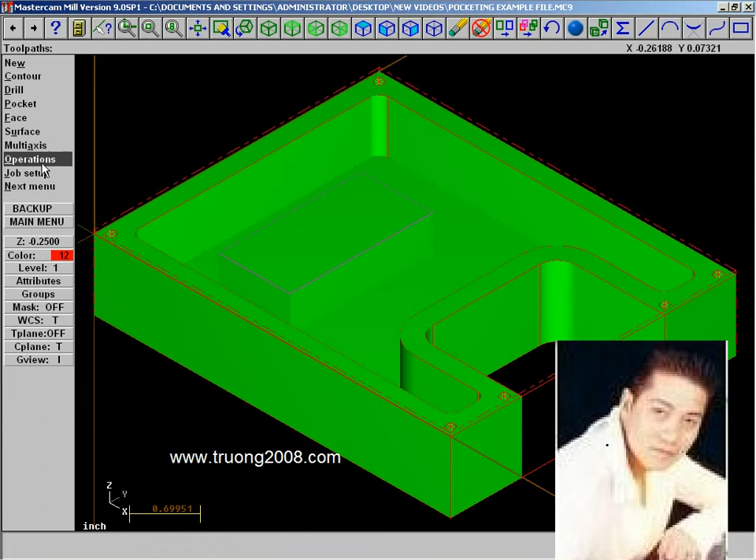If we select our Operations Manager here from the Toolpath menu, we can see that our first pocket here is selected as a pocket, but it's also set to facing. So let's select just this toolpath, turn the toolpath display on, and let's look at what we're doing. We're using this toolpath to face the top of the part. And let's look at how we do that.

If we click on the pocketing parameters, you can see that our pocket type is set to facing. And if we click on the facing button, we can see that the overlap percentage, or the percentage that is going to overlap the outside of our boundary, is set to 50%, telling us that our overlap amount is 0.25, and we're using a 0.3 approach distance and a 0.3 exit distance.

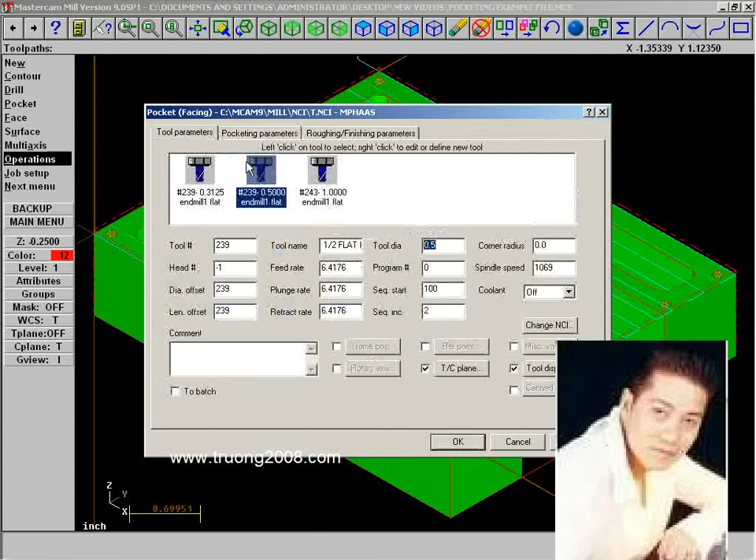If we go into the tool parameters, you can see that we've got a 1/2 inch flat end mill selected. We're not using depth cuts in this case, although we could, and we're set to climb milling. If I click on the roughing and finishing parameters, you can also see that I've got this set to rough it out in a zigzag pattern, and we're not doing finish pass spacing around the outside boundary.

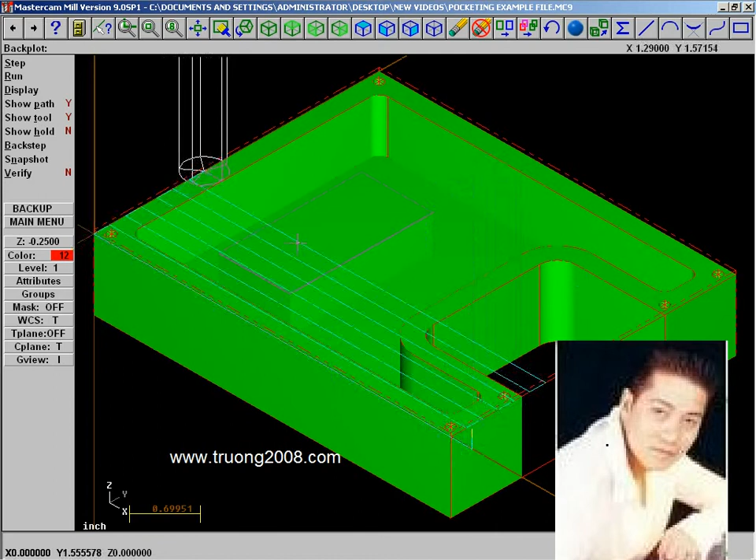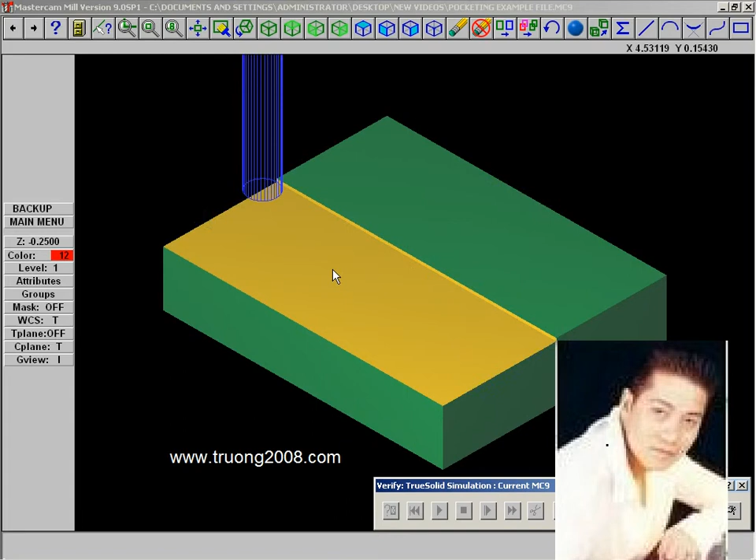So we say OK, and let's backplot this. And as I press S on the keyboard, we can watch the tool feeding across the face of this part. If we take that same toolpath and we click on the Verify button, let's go in and make sure that our job setup values are correct. Now if I turn down speed a little bit and press play, we can watch as the tool comes in and just faces off the top section of our part.

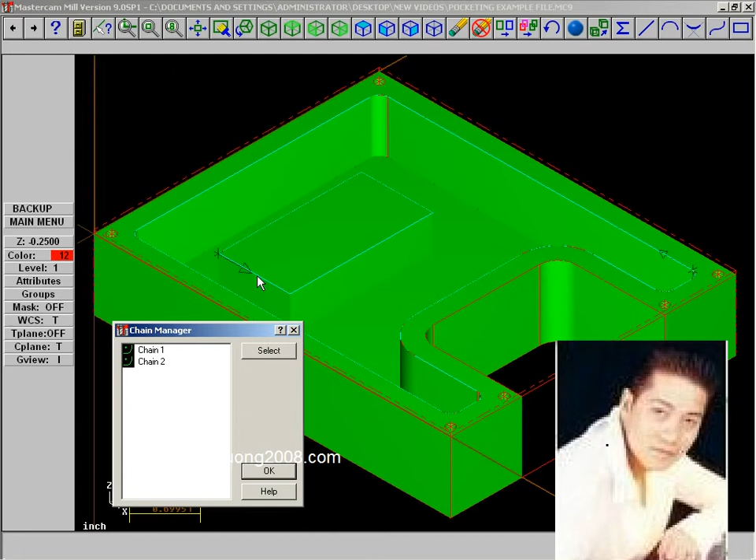So facing is one of the pocketing options we can do. Let's go ahead and turn this toolpath display off. And let's look at our next style of pocketing, which is island facing. Notice that for the island facing we have 2 chains selected for our geometry. If I click on the chain manager, we can observe those. I've got the outside contour of the pocket selected, as well as the top of our island.

Let's look at some of the parameters now. Let's look at the pocketing parameters. You notice that the pocketing type is set to island facing, and when we set it to island facing, it also gives us our overlap percentage and overlap amount. We can see that our approach and exit distance from the island is 0.3, and the stock that we're going to leave above that island is 0.0. We're actually going to finish that island at this step.

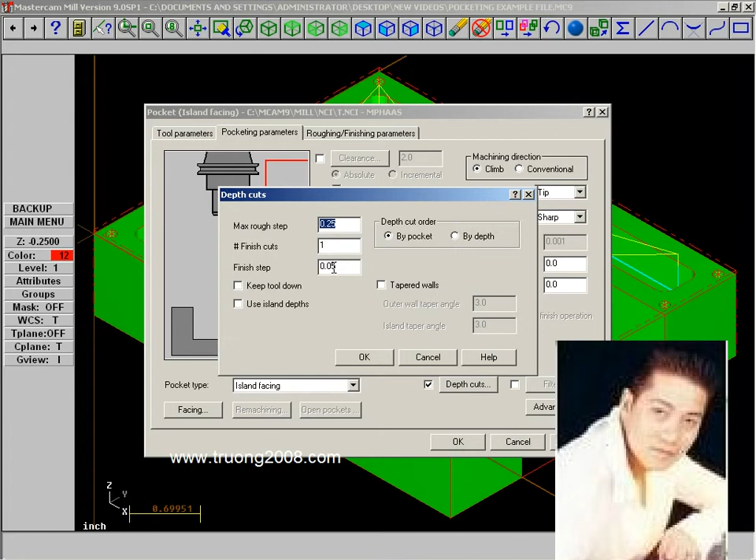We can see that we've got our depth cuts button turned on. The maximum rough step that our tool can take is 0.25, 1/4 inch, and we're going to do one finish pass of 50 thousandths of an inch at the final depth. If we look at our roughing and finishing parameters, you can see that the roughing style we've chosen is a parallel spiral with step over percentage of 45%. We're going to do one finish pass, and we're going to finish the outer boundaries of our pocket.

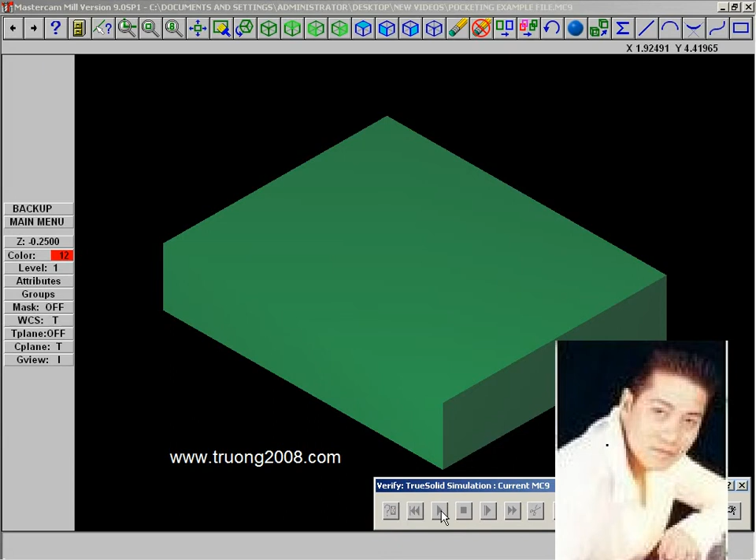So now let's go into the Verify, press play, and we can watch as the tool goes around and machines out the inside of our pocket. This is its first depth pass. You can see it as it goes around. It's going to make its second depth pass. Notice that it comes across here and does a finish pass on the top of our island. And the tool is going to continue to work in the pocket, doing its rough moves.

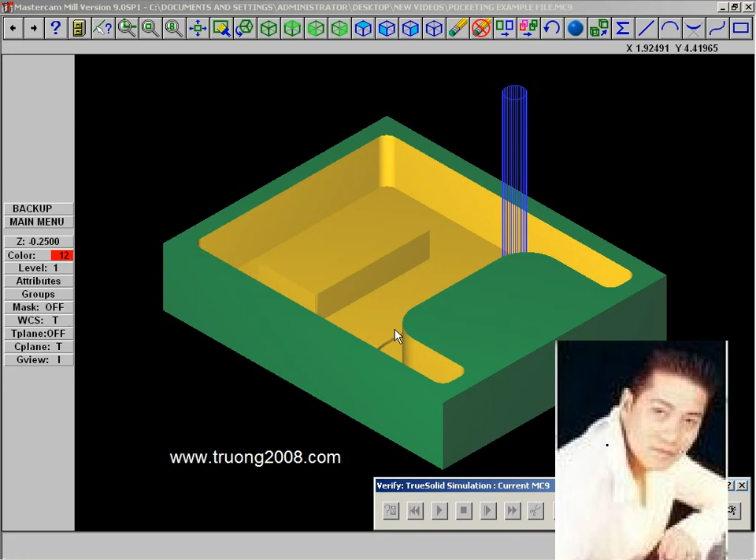It finishes its last rough depth cut and now goes to its finished depth cut of 50 thousandths of an inch. And the final step is to walk around the outside boundaries and do a 10 thousandths finish pass on the boundaries. And this is going to conclude our look at island facing.

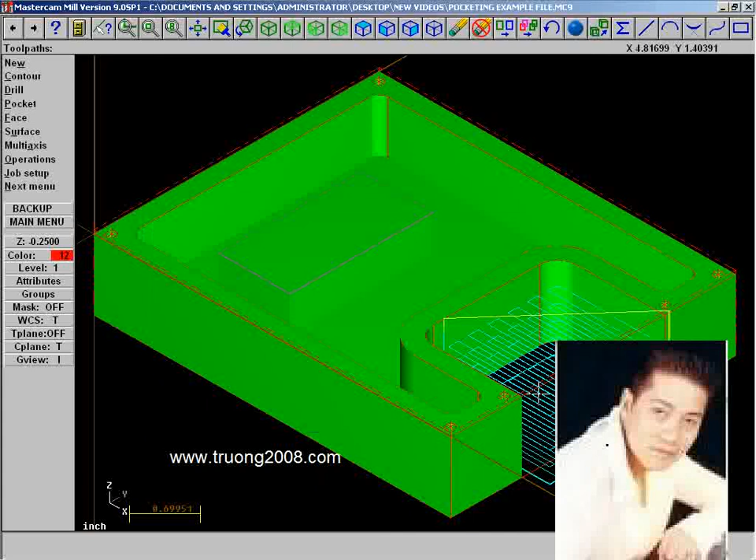The last thing that we'd like to look at here in Mastercam, let's turn this toolpath display off. The last style of pocketing we'd like to look at is open pockets. So let's select the geometry for this. You can see that we've got one chain in our chain manager. And now if we turn the toolpath display on, we can see that we're using the open pocket to rough out and finish this end of the part. Let's go into the operations and look at the parameters for this.

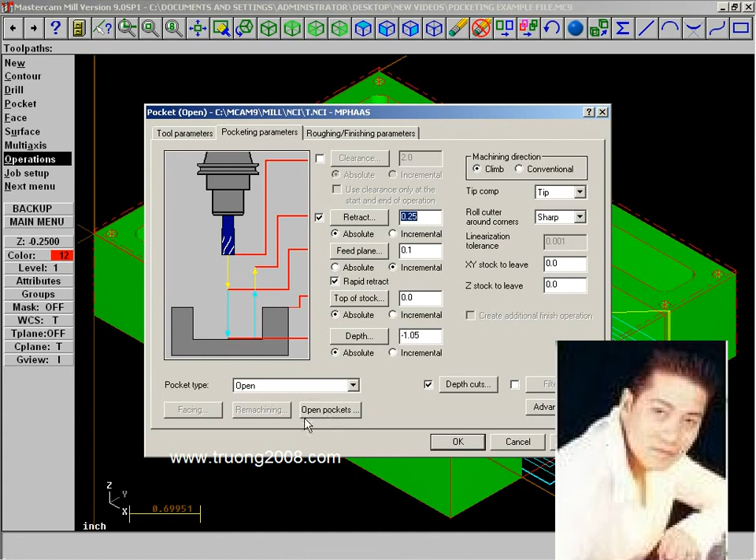You can see that we're doing a rough style of zigzag, and we've got one finish pass of 10 thousandths of an inch. And if we look at the pocketing parameters, we can see that the pocketing type is set to open. And this is going to enable our open pockets button. So if we click on that, we can see that the overlap percentage, or the percentage that we're going beyond the open pocket chain, is 125%. We've got our depth cuts turned on.

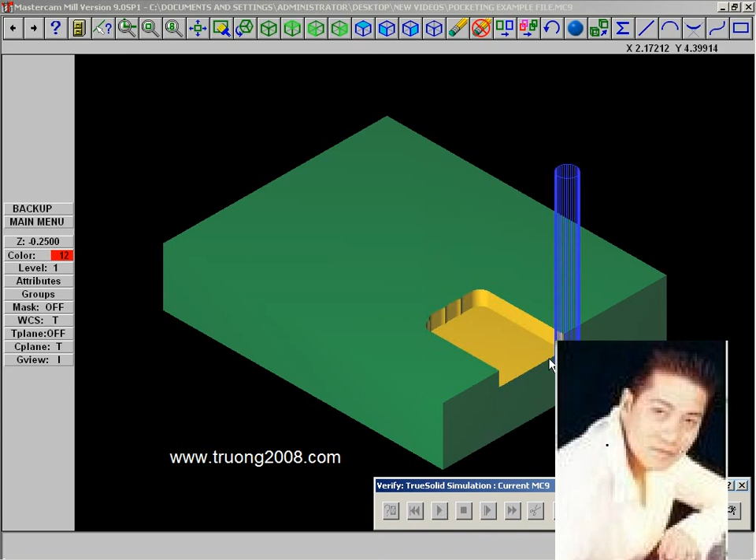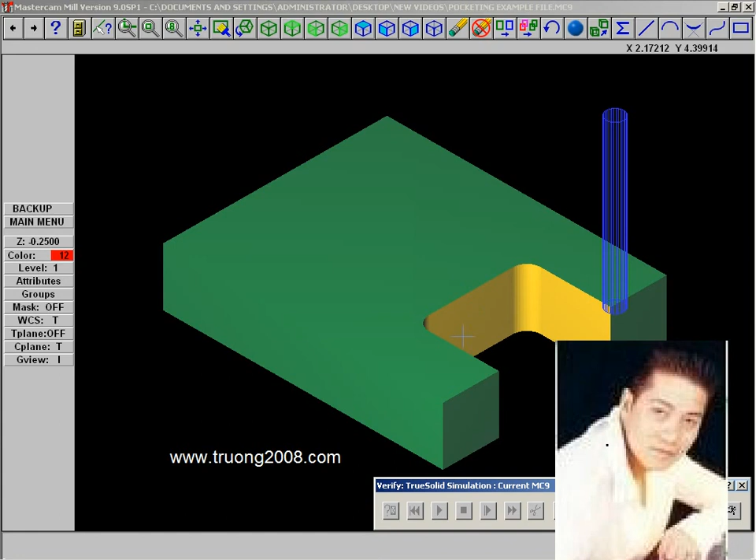And now if we go in to verify this, we can play it, and we can see that Mastercam is going to pocket out and finish this cutout in the end of our part. So Mastercam goes in and roughs that out with its roughing style, taking depth cuts. Finally, it comes in and does one finish move of 10 thousandths around the outer boundary. And this concludes our look at pocketing inside Mastercam.